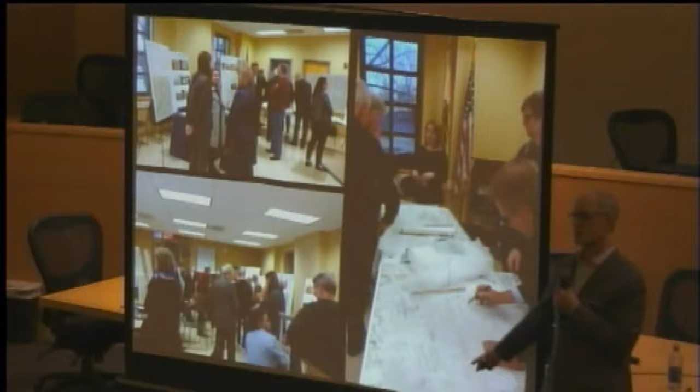I think some of you have heard this discussed previously. There were plans that were shown last year by the seminary, and then there was a stop on that as we went into this redevelopment process. It was declared an area in need, and we really were starting, to some degree, not with a complete blank slate, but certainly with, I think, an openness to receive ideas and try to respond.

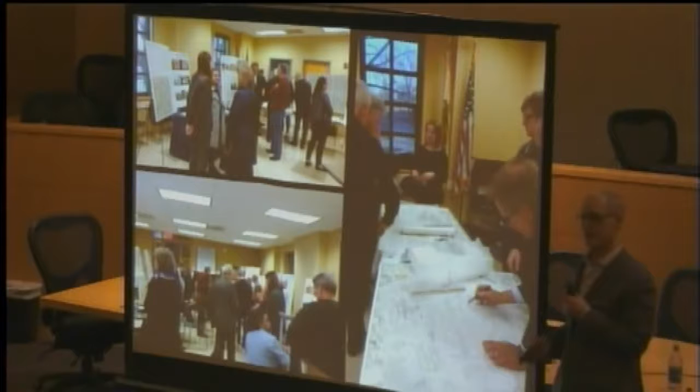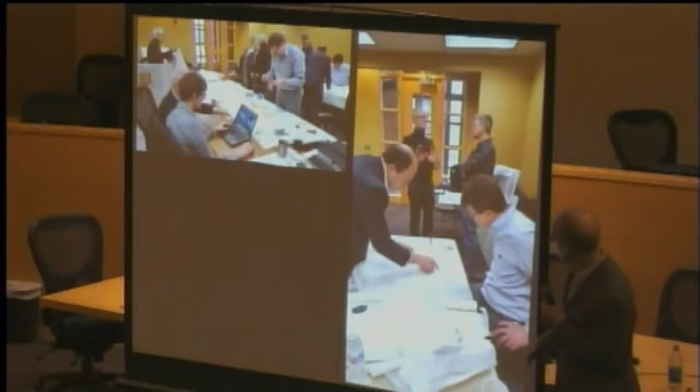Certainly one of those primary goals was to involve the community and the neighborhood. The council said this emphatically back in June when we started the process, to try to create outcomes better than existing zoning. So we took some of this information in, and came back with some concepts last night for the site, and everything's oriented the same.

I think you all know the streets and the area, so we won't go through that. And we showed you an approach A.

We showed you, we heard some things about this. One of the things that was sort of a sticking point was coming in from Stockton. We showed an approach B, which had some great spaces and everything to it. So there were elements of this that we incorporated.

Approach C, which was placing larger buildings closer to Stockton. We incorporated some of that. We looked at some of the recommendations from the Historic Preservation Commission and also had spent some time with them today really trying to work through those.

We also had an approach J for neighbor Joel Schwartz, who dropped in at 3 o'clock yesterday. We felt what he did from 3 o'clock on, we gave him a chance to present last night, and there actually were some ideas that he presented and shared that we incorporated as well.

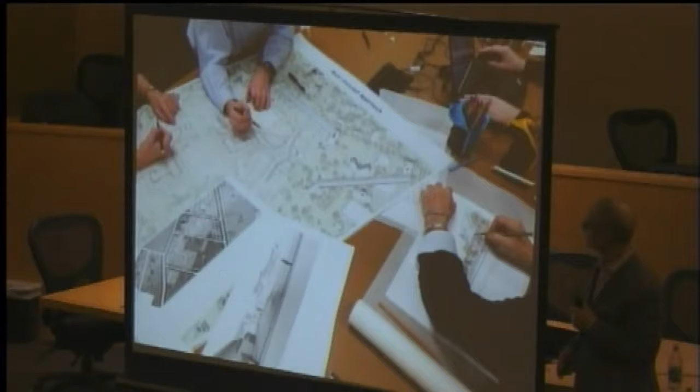So from all of that today, we had more than our work cut out for us to try to translate that, and it really was a team effort that you'll see the results of today. I think that's Rayford's hands at play there and others across the table to the plan that we have before you this evening. So we'd like to try to walk through this in pieces.

We do have it shown at a little greater scale so that you begin to see, because we've had refinements in everything from the gateway at Hibben and the roundabout and what's proposed on Edgehill, as well as to what's actually arranged here in this location as well.

I thought before we get into the plan, it was worth sort of noting this has been a collaborative process. This redevelopment process is different. It's the first time Princeton has used it. It's had incredible levels of neighborhood and community participation.

Keep in mind, the normal way that you end up participating, usually as a community, as neighbors, is you get a notice and you're coming in and there's a fully baked plan and you're beginning to see presentations and having to respond sometimes as it's appearing before public bodies.

In this case, some of the big things that happened as a result of the process: the recreation field on Mercer is being preserved. It's currently zoned for 4 single-family homes, and that was something the seminary offered right up front. We grabbed that property and pulled it into the redevelopment plan because we can use the redevelopment powers to give the municipality and to give that land

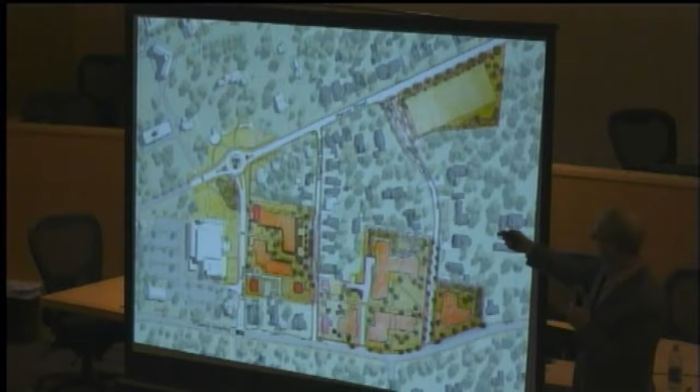The Seminary Library is here at Library Place. Some of the larger conditions we've talked about on Mercer Street—the preservation of the field, an enhanced gateway coming into Hibben. I think it was discovered that the original design for Hibben did have a forked entry. We've calibrated that back in order to accommodate a full recreation field at that point.

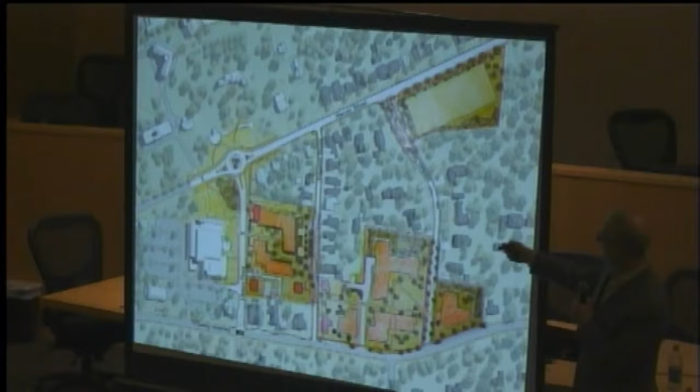There could be some sort of defined, identified gateway at that point that further chokes and pinches the traffic down as you come onto Hibben Street. We've reflected that at the other end with a roundabout at the intersection of Library Place.

A lot of focus on how we can make Library Place perform at a higher order, really be the collector that it should be. We know people now avoid Library and shortcut down Edge Hill or up Hibben, so we really want Library to function better. There's been discussion as well about signalization and possibly an additional turn lane at the other end.

Part of the adjustments we've made on the roundabout, working with the Historic Preservation Commission, have been trying to maintain the sidewalk along Mercer in its most direct route possible, so that you weren't having to bypass the roundabout—and that involves sliding that roundabout into some of the Seminary property on the other side of Mercer Hill.

We think it will help Library Place, it will help Mercer, Bayard, Nassau, Alexander further up the road, and to some degree, if we can raise the performance of Library Place as the major corridor through this area, it should help Lover's Lane as well.

Ball field, fence would come down, some landscape improvements, and a paired, narrowed sort of one-way street in each direction around those existing trees.

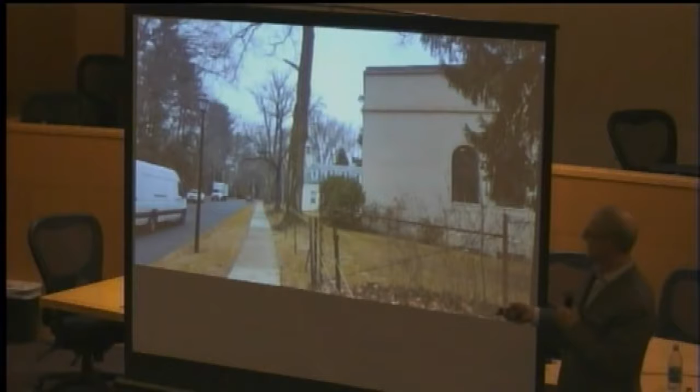We talked a lot about the fact that the blank wall is really sort of a visual terminus. When you hit this first point, speeds are definitely higher than 30 miles per hour at this stretch through here, and what's proposed is to basically create a new landmark, an arrival to Princeton, arrival to the seminary at this location.

And Rayford, I'd like to have you maybe speak to this a little bit. Thank you. I think responding to what Gail has kind of set up for us, there are a variety of forces that we are trying to acknowledge and to work with, engage, and create, both with the neighbors for the seminary, and I think for Princeton at large. So part of the anticipation here is we are trying to create a residential campus for a community, for an institution that's been here for several hundred years.

And as Gail has so aptly said, we would anticipate whatever we build here is suggesting another 100 or 150 years, if not longer. Like the educational institutions that exist in this town—and I must say, as someone who comes from a very large college town up the road, this is very important to acknowledge the role that these institutions play. It's really important for us to acknowledge when the town has actually incorporated into its planning formulas the idea that we need to acknowledge the inhabitation and the institutional presence, that we can acknowledge that in the form of a gateway that really speaks to what we're doing here in Princeton.

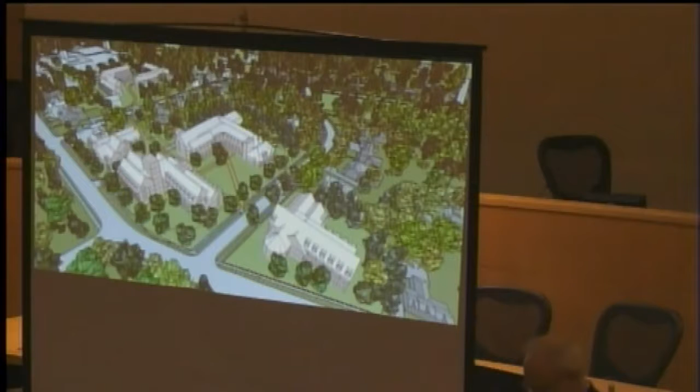So to improve upon some aspects of the Scheme B that we were showing you last night, because we recognize as architects we probably become a bit inured to what we are modeling, and realize, of course, with your responses that the absence of trees, as well as knowing that when we had modeled it, we may have actually inflated or overinflated the massing of the building. So we wanted to make sure to come back today with a sense of some, I'll say, hybrid between Scheme A and Scheme B.

I'm really defaulting to Scheme B, because when we look at that footprint, it actually has the least amount of building on the site. As Joel mentioned last night, we feel like that creates more open space, much like what we currently have with Tennent Green.

So the idea, as I mentioned before, and I'll talk about it in diagrammatic terms later, is to utilize this real estate to provide a pedestrian campus. Part of that challenge has to do with helping with the traffic issues that are currently here.

Quite honestly, these traffic issues are not related to the presence or absence of the seminary. This is a more regional problem of how people come in and out of town. But that's part of what we're trying to help with, because we're talking about people living here as well, and we feel that pedestrian environment would be very important.

To be efficient and minimize impact on the site, we'll generally use a form of building that is a double-loaded corridor, but with the dormers and double gables, we're trying to follow the tradition of what Tennent Hall was using. When you look at the details of Tennent Hall, all the detail is actually on the roof—it's how the building meets the sky. That's part of what we're trying to do here.

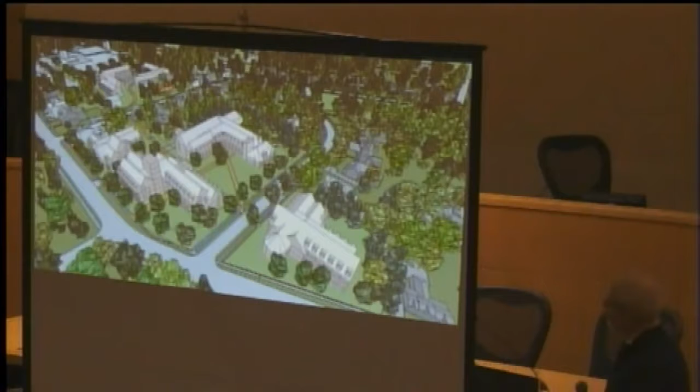So we provide, as you saw in the perspective—let's go back—the idea that this is more symbolic, and that the usable spaces are in fact behind. We're not fencing this off from the neighborhood. This is space we can all enjoy, space we can all use as we walk into town, to be off the city streets—that's part of the intent here.

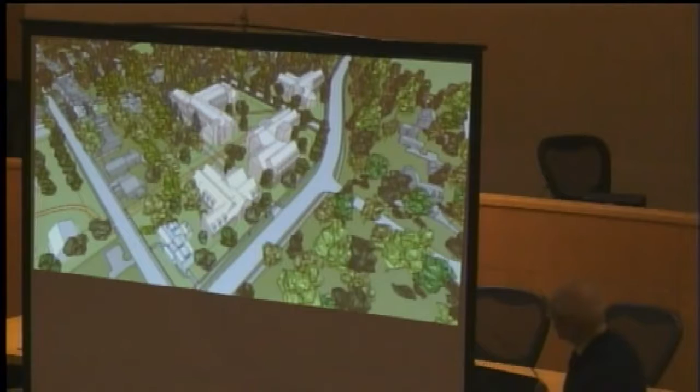Here's the view from above the intersection at the end of Edge Hill. There's 35 Edge Hill, and there's Silvana's—the Clark's house—with the path coming through.

So there's a sensibility of putting most of the massing along Stockton. There's a bit up against the buffer, as you see here, but we're stepping it down as we get close to the house adjacent to the south. So we've been working to tailor and stitch this, while still holding on to the target unit count.

We'll admit there was some inflation when we were modeling yesterday, so as long as we're hitting our target, we can accommodate it with this kit of parts—varying ridgelines, varying heights of buildings, with the motif of an inhabited roof, because that does signify residential life.

Just to go back briefly, what we were speaking to was the ability to keep the students, but not exclusively the students, on campus. Starting from the existing condition at the newly renewed intersection at College and Alexander, the idea in the master plan is that we would come into the core campus—the chapel, the student center—which down the road will need to be replaced.

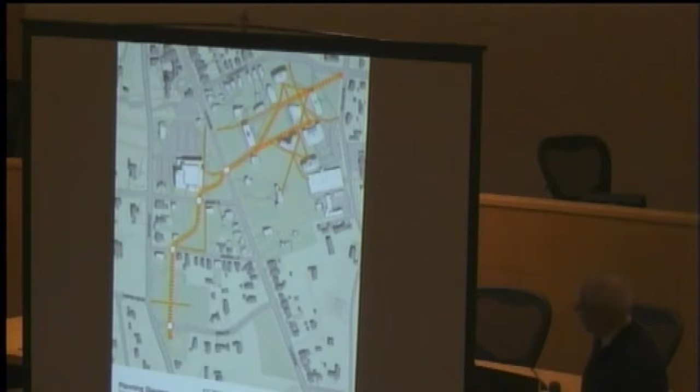So the idea here is that we keep that path intact as a general strategic guideline for organizing open spaces along that path. As I spoke to you last night, even as an architect, what's humbling is that it's in fact the landscape—it's the land between the buildings that actually defines the character of a campus. In most cases, as you see in my perspectives, these buildings should be the scenographic backdrop that reinforces that more Arcadian nature and the serenity of a higher education institution.

And thereby, this is what's important: what we experience, what we like about walking through the seminary or the university campus, is that sense that I'm somewhere else, something that's been redefined. It's a place designated for formation, for education, and I'm in a unique spot. This is something we all acknowledge in Princeton, right? When we walk through the university or the seminary, whether with a particular destination in mind or not, we find it's just pleasant enough that there's enough amenities for us to enjoy.

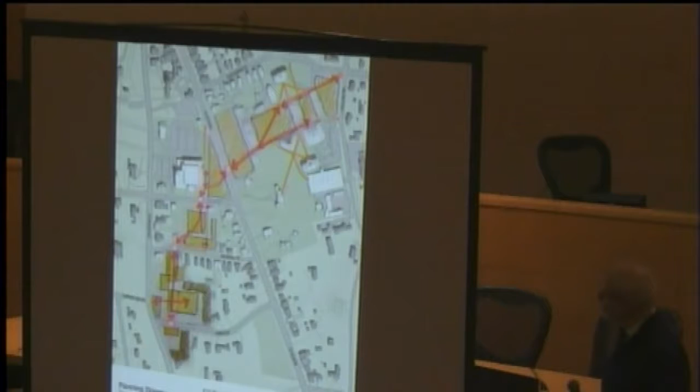And I just wanted to add to the note you mentioned—we do have some model views we're showing this evening; we had some last night. We believe this fairly new, very smart projector was registering in autofocus, and it had actually distorted everything. So for those of you here last night, things looked shockingly large. It took us a little bit this morning to decipher and say, wait a second, this didn't look right. The projector was autofocusing to a proportion that made everything look larger and taller. But yeah, we still looked at the massing and addressed it, though it made everything shockingly disproportionate.

So let's talk about some of the components of this transition into town that we spoke about before. Rayford spoke about—we've actually brought a wonderful building with a little nod to our Scheme J, Joel, out here at this point. It may look familiar, as part of this whole approach into town.

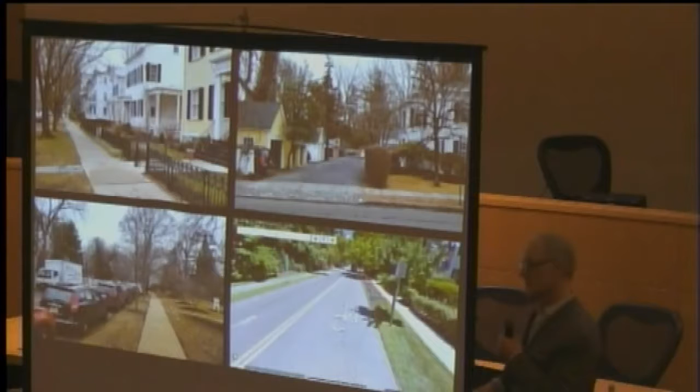So as we were looking at the corridor and understanding some of the issues, one thing that came out was trying to provide an opportunity to bring the on-street parking, which right now begins further into the center of town, out as part of the whole ensemble of approaches to create this sense of arrival that pulls itself down to the campus. Part of that was suggesting the use of a rear lane, similar to what you find on Mercer Street. That lane would be located off of Library Place, which allows the homes with driveways on Stockton to have driveways from behind, and then gain on-street parking on Stockton, which begins right now over here to the left near Trinity Church.

And to bring that down—actually in response to some of what we heard last night—we think parking should come the full length all the way down. Obviously it could be a decision whether it goes further; it may not be warranted. Also, the removal of any parking from the existing gym site allows on-street parking there and on that part of Hibben to provide convenient service for that portion. Again, a little choker or neck-down in the street on Hibben would delineate entering the residential portion of the street. That parking would work in conjunction with the sight lines to the vista we showed you, the little plazette at the corner, and extend itself down into town in a seamless manner.

I should also go back and indicate one of the other opportunities with the on-street parking on the plan: for instance, there's a passage through here, a sightline from Campbellton through there. So somebody could park here and walk over and through that passage to reach back into the buildings—wonderful experiences that activate. I think that's one of the other things that will work in addition.

It's not just the on-street parking, which certainly makes walking and biking more feasible, and would turn this section—right now a highway pushing into town—into a complete street. The whole plan is really envisioning activation where you'll see people and movement, increased foot traffic, bicycle traffic, students—the life of a college town will help with that sense of arrival.

So that brings us to Edgehill Street, where we've spent lots of time trying to focus on ways to bring the hidden garden out, and ways to turn what's right now a blank wall at the back of the institution into an interface with a wonderfully rich residential streetscape. I'm going to have Myra Baird come up right now and speak to this, since she's been working on this for the past couple of days.

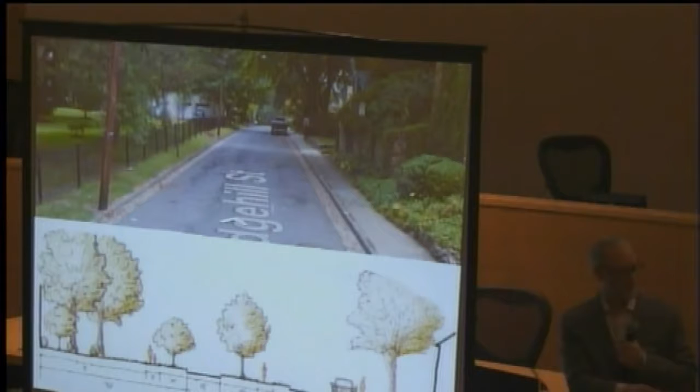Is the plan on the next slide? Plan is on the next slide. Okay, I'm going to start us with the plan here. So what we've been talking about is introducing a traffic slowing device along Edgehill by introducing a change in paving from this point down to this point, which would all be a special paving slightly raised above the existing grade of the street.

And then it would divert traffic—at this point, driving along Edgehill would become one-way going down toward Mercer, and coming back up from Mercer you'd come around this arc. So it would be slightly diverting and narrowing within this area to slow traffic. It would allow for on-street parking, and this whole vicinity would become a clearly designated safe pedestrian zone with slower traffic and site amenities.

This begins with the seminary's distinct desire to have a through, safe, accessible pedestrian route throughout campus. To connect Tennent Roberts and the new development into this, that's one of the reasons we're beginning this paving change at this point—to designate that this is becoming a pedestrian zone, so that pedestrians have safe passage over, across, and through the eventual new development of the Erdman building.

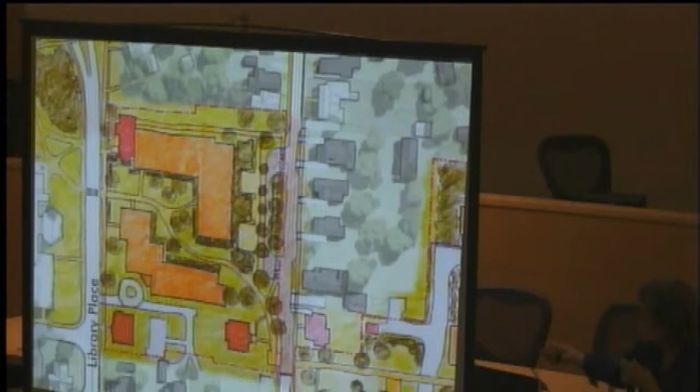Before we began this process, we had been talking in the master plan process with the seminary about the commitment to maintaining this green zone, even with the new development of Erdman within the next 10 to 15 years, so that it can become a community space and amenity for the seminary. What we're showing in concept here is a green forecourt and a more garden-esque area behind, with small areas for seating and gathering, enhancing the lovely planting that already exists throughout the campus.

I'll go back to our section here. So what we're seeing in section, up by Erdman, would have this larger area—about 55 feet—with a seating area up closer to the building, coming out to a pedestrian walk and some perhaps understory flowering trees.

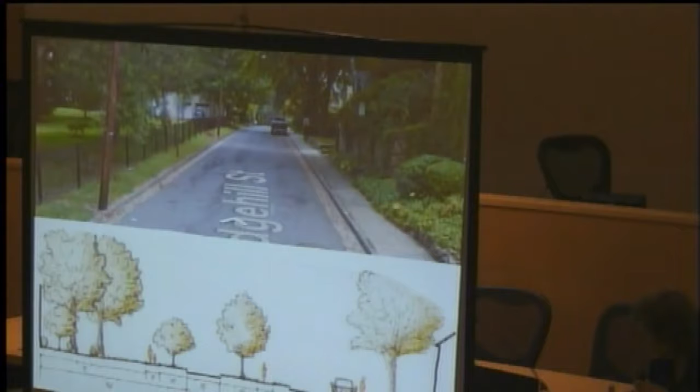This would be your narrowed one-way 12-foot traffic lane, and then this intermediate horticultural forecourt with trees, a pedestrian path, and turf. This would be your main route going straight down toward Mercer, with some on-street parking and the existing houses. We think this combines addressing traffic circulation with knitting together and enhancing the community.

Thank you. Yeah, so that right there would basically be right where the fence is today.

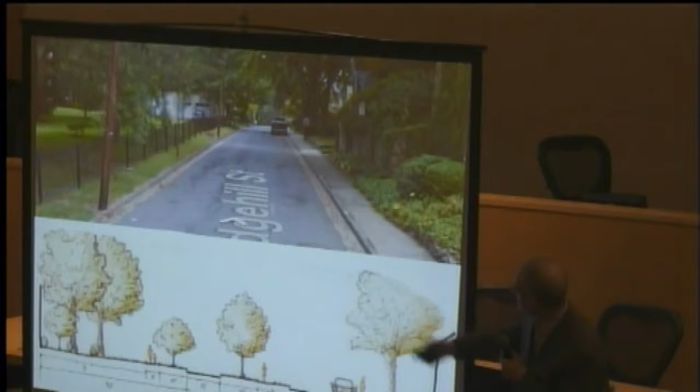We mentioned also an approach even at a very fine grain level—in the access to parking, we've also tried to accommodate the Clark and Jacobus properties to provide for some parking, in fact enhanced parking from what's there today, with access from the rear, so actually increasing their capacity.

That's right in that location there. As I mentioned before, there's an access point for parking under the buildings coming from Stockton Street, between these two buildings here, using the existing driveway, a fairly straight T. We've had lots of discussions since it's a little safer to turn there than from Hibben. The whole orientation approach is using the campus as it extends down Hibben and over and across Edgehill to really help become part of that whole sequence of arriving in town, arriving in a college town, arriving in Princeton.

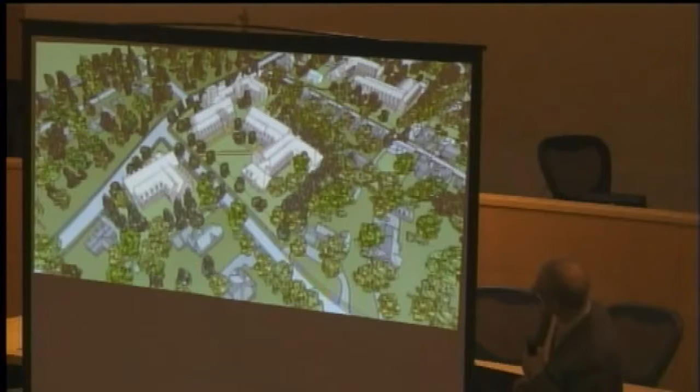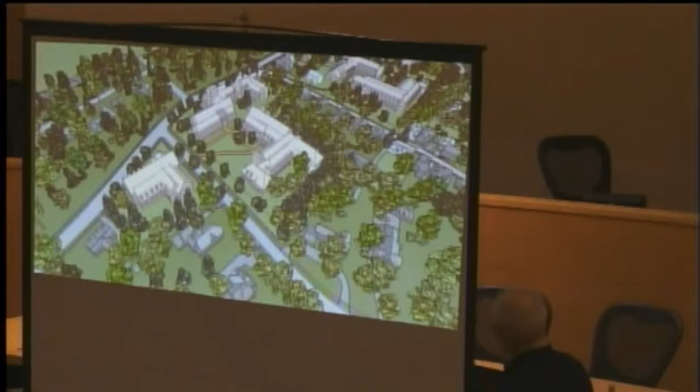Throughout the week, as well as hearing quite directly last night about the intent to put the bulk of the demand for the housing up along Stockton, and as you saw in my sketch, the idea that we use that bulk to signify that form of the gateway, as well as introducing the seminary boundary in a more traditional way, rather than discovering that you're in the seminary when you're in between its two largest buildings.

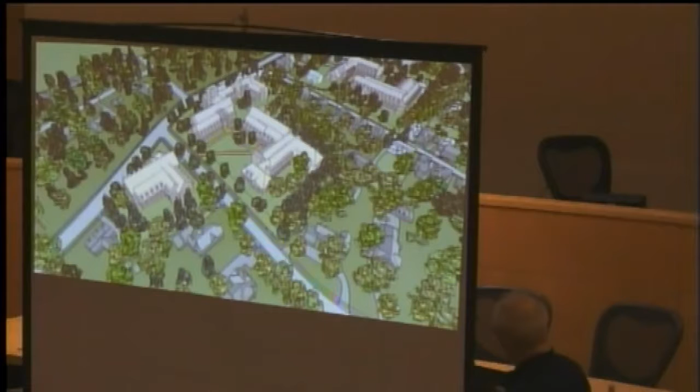So when we go back to look at the massing, we heard immediately last night from Patrick that 50 feet might not be enough. But just to give you a sense of the modeling technique the technology shows us, starting with the conventional prescriptions for the buffers that would separate the R1 from the E4, we would really plant heavy vegetative areas that are also doing stormwater management.

There will be the need to manage all of the water that starts at the top of the hill. This is something we have all inherited, right? With increased development, with the start of the schools that were at the crest of the hill along that ridge line, it's about how we can actually manage the rainfall as it comes, how we keep it, store it, let it percolate through in a very substantive way.

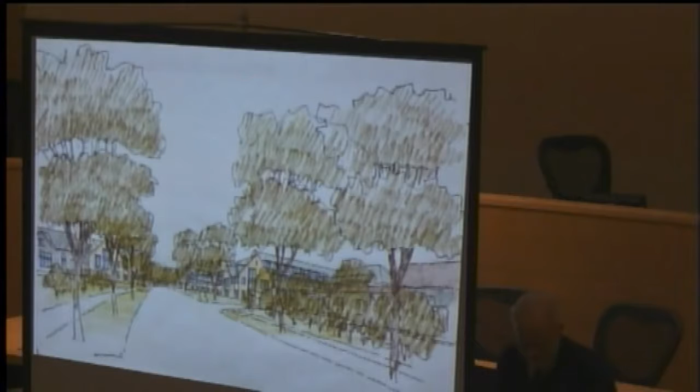But it's also about creating a different kind of space that complements the neighborhood, in addition to the buffer. You can see it starting to scale down both in the backside here in the corner, as well as the approach to the street, so that when we look from the street, we feel like what we're proposing is an extension of that residential community.

So we see the neighbors' houses to the right and to the left here as we're looking up Hibben, and how we are using the motif, much like Tennent, but in a deliberate way that speaks specifically to the seminary character—the idea that we have a residential zone here that is respondent to the scale of the adjacent residential neighborhood.

I have been a little selective in eliminating some of them so we could at least see some of the character with the photographs that we have been taking, of course.

The London plane trees are there, and one of the positive aspects of the gym going away is we didn't have to do all the gymnastics to deal with the traffic—that was actually being threatened by the idea that we create these sort of traffic calming devices. So it's our intent to keep those trees, those hardy London plane trees, when they are healthy.

I think it's also important that what I'm not drawing here, as Silvana and I have talked about, is that I've deliberately eliminated the vision of those overhead utility lines. So that's something that's going to be on my radar here in Princeton for the next years.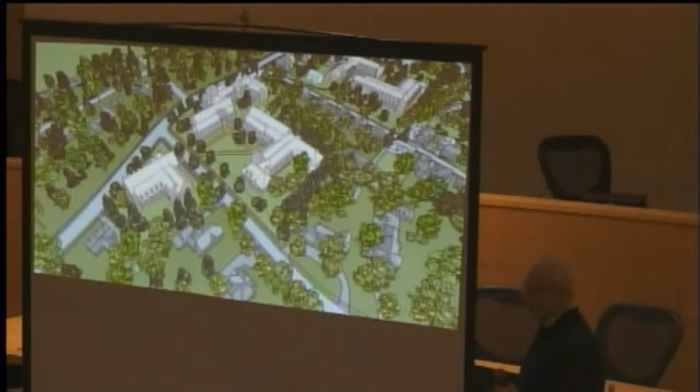I guess we also want to touch on the character that we feel would be appropriate to be respondent to the scale of the neighborhood, as well as generate a distinct but not monolithic or homogeneous character associated with the seminary. As I said before, the idea is to be efficient. It's going to be a double-loaded corridor, meaning a corridor down the center with units to either side, which presents us with a very broad footprint and a broad end.

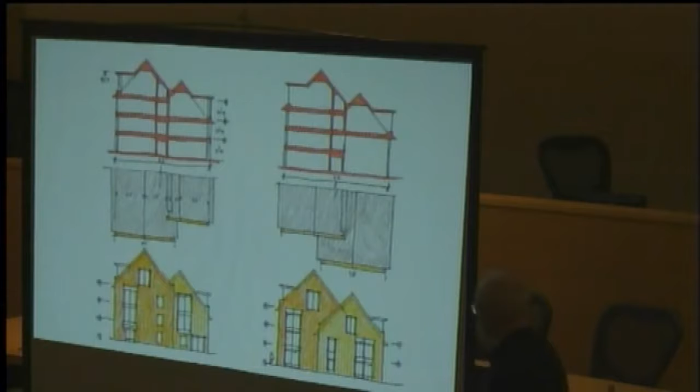I developed the idea that with offset gables, I can reduce the scale of this, creating dramatic bay windows and attic floors, because as we note from the tenant, these are the rooms that everyone loves—when I inhabit the roof, I'm inhabiting rooms with character. The idea is that I can lower or raise these to temper the scale, going from 3 or 4 stories plus the roof as we approach Stockton, down to 2 stories plus the roof as we head closer to residential components. Coloring them shows how the twin gables can be scaled down to look residential. It's institutional, it is the seminary, but it presents a sort of collegial housing associated with people living and learning there.

Stairs can actually provide moments for dramatic interruptions of the horizontality of the floor plates of the housing. So you have bay windows, large corner windows—the types of things we see in the neighborhood houses—and with the gable ends, you can use the towers to mark the institutional presence. I'm not sure we'd need to go that tall, but the idea is that I can see people in and out of the stair and connect to people in the buildings.

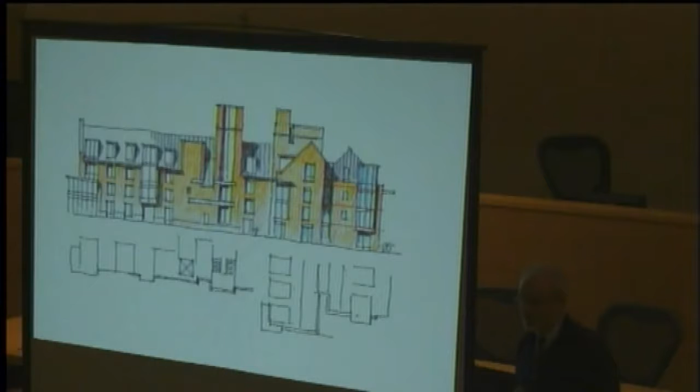In 3 dimensions, the twin gable and the 12-foot bay we're generating gets at the character we're talking about. This is an early sketch I developed to convey the appropriate character, as modeled on the site—starting with the idea of a roofscape inhabited with dormers, a traditional roof with traditional material, if not traditional looking material, to reduce the amount of wall by making the floor at the eave line more transparent. So I have an eave that's hovering instead of a parapet, all to reduce the amount of wall and the impact of the building on the site.

All this was drawn before the redevelopment process, so we were trying to keep everything, as we still are, to a reasonable height, floor to ceiling, floor to floor, that would keep the top of that dormer within the current code zoning compliance.

Mark. To the ridge line, yes. But the town only measures to the eave or to the dormer. Say again, I can't hear you. Well, at least as you instructed in November—thank you—because we were measuring as instructed, we weren't measuring to the midpoint, we were actually measuring to the top of the dormer.

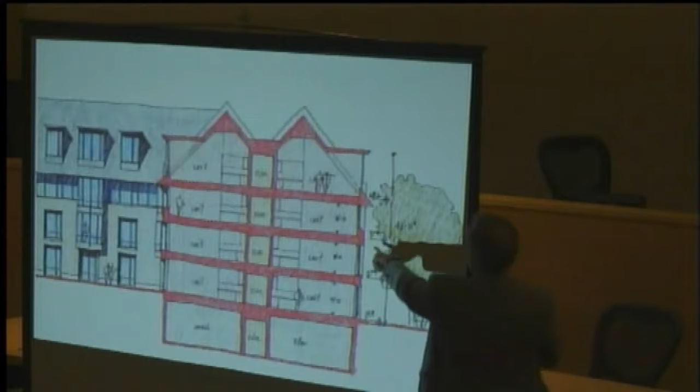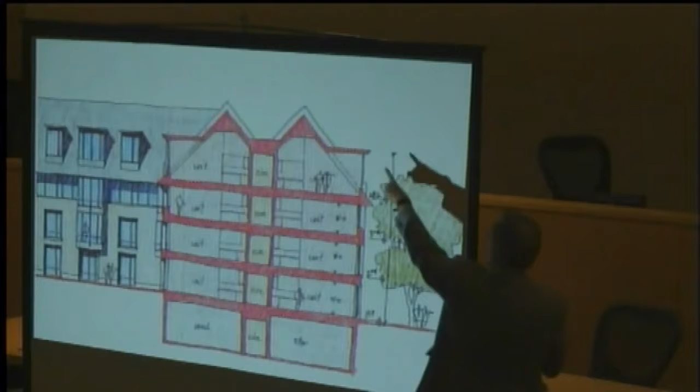So, for example, in this section that we've drawn here, you see the eave line, where the entire dormer line at the center midpoint of the roof is about 43 feet, and you're going to have a space that's probably about 11 feet lower than that, about 32 feet, to the eave line where the roof comes up. We wanted to give you some context so you have some assurance based on other buildings.

So Rayford just spoke about that, but let's look at some of the other buildings on campus. These are actual measured drawings. We're looking at Stuart Hall from the late 1800s, and of course, being a classroom building, it had much bigger floor-to-floor heights, 16, 18, 17 feet.

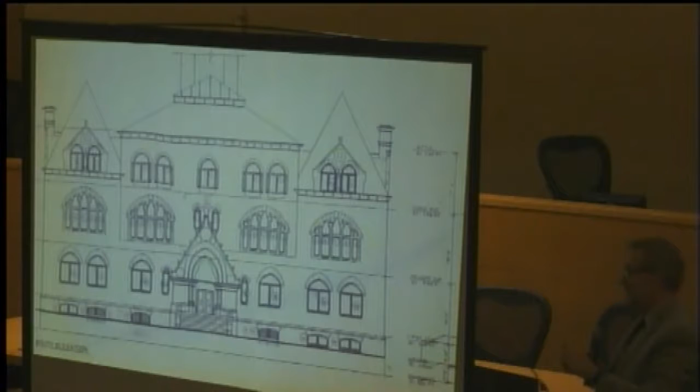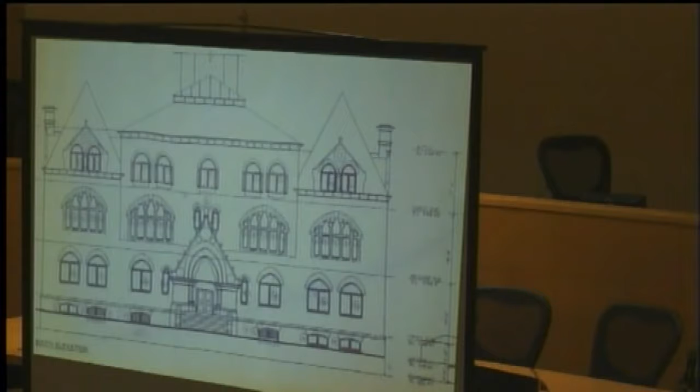But when you get to the top of the highest eave point, right here in the center of the building, you're already at 45 feet, which is only at the midpoint of the dormers, the midpoint of the roof of the buildings we're proposing. And again, these are the buildings at that eave line out towards the Stockton Street side. The buildings back towards the residences and towards Hibben are going to have an eave line more in the range of 35 feet, with a midpoint of the roof only being about 39 or 40 feet.

Another example is the library. The library again has larger floor-to-floor heights because we have larger spaces to accommodate the stacks, the meeting rooms, and even classroom spaces. There's also the atrium in the center of that building if you've been there. Again, we're looking at floor-to-floor heights in the range of 14 feet.

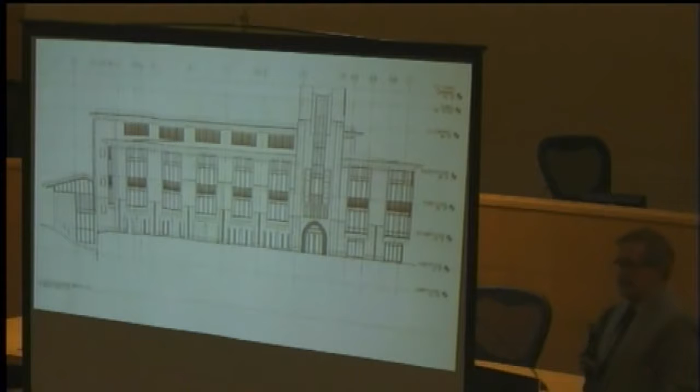Well, this is the elevation that faces Mercer. The height of the top of the parapet of this building is 60 feet. Then this lower eave line, which faces Library Place, is about 42, 45 feet. So again, all of the buildings we're proposing are going to be lower than that — not only the eave line lower, but actually the peaks of the roofs are going to be lower than these buildings.

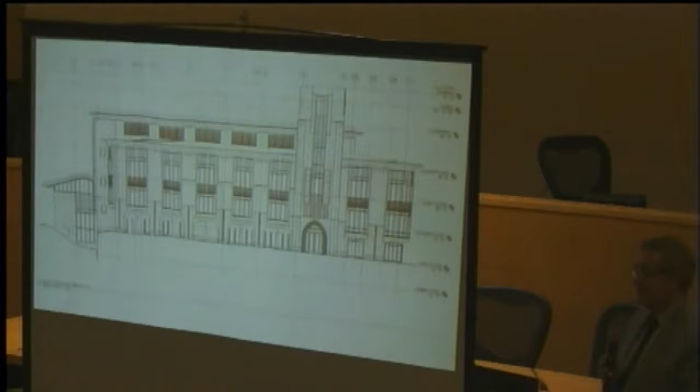Another comparison — again, these are measured drawings from construction drawings, actually measured from the project currently renovating Brown. This building has floor-to-floor heights very similar to what we're going to have, in the 10 to 11 foot range.

So approximately 11-foot floor-to-floor heights. The eave, where the roof begins to spring up, is again about 45 feet, and then the peak of the roof is about 59 or 60 feet, which figures in because in an E4 zone, where these buildings are located, that's the zoning peak — the highest point of the building has to be at about 60 feet. By comparison, we want you to see that the buildings we're proposing — the tallest being along Stockton Street, per what we heard from you last night — then step down a whole story as we get to the buildings along Hibben, backing up to the residential neighborhoods.

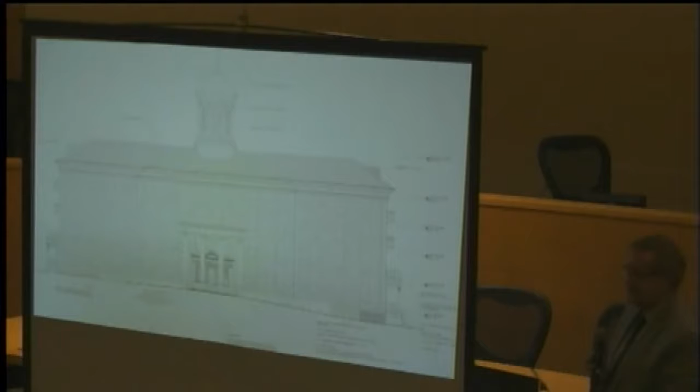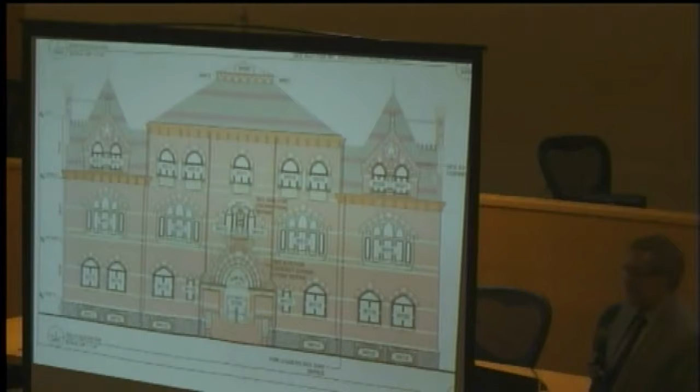And one more example — this is just another measured drawing of Stuart. We went over Stuart before, so again, this is actually a drawing from the preservation work going on now, preserving the stone and replacing the stone, and the roof work currently underway on the main campus.

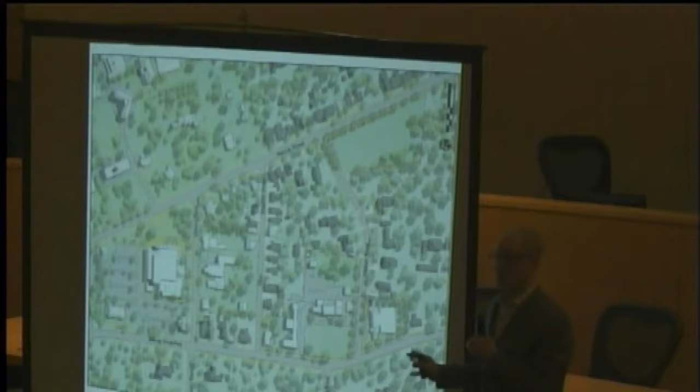Until that time, there's some next step, and the municipality under redevelopment is in full control. That doesn't mean that this plan is approved or adopted. As of today, the existing zoning is still in place, so that's important to recognize, and there is development potential as of right with the existing zoning.

So some of the advantages we believe are available in this redevelopment plan process is the ability, first and foremost, for greater control than conventional zoning, including the ability for absolute preservation of both structures and land. So things like the ball field down on Mercer, which is currently zoned R1 and can have 4 single-family lots as of right,

could be preserved under the redevelopment plan in an absolute manner—site-specific conceptual plan and design standards. So if the municipality goes forward with a redevelopment plan, they'll have a choice about the degree to which they actually develop and lock down in that plan what will happen.

That's different than zoning. With zoning, you create a formula, and then you wait to see what comes in that meets the formula. And right now, the master plan suggests and has lots of concerns and warnings that it lays out, that the educational institutional zoning can result in things, especially when it's close to residential neighborhoods, that have incredible impacts that the formulas can't envision.

So we have control to be able to custom craft this and continue to get feedback and input in terms of refinement. And then setting standards, the plan can be absolutely specific, so you know precisely what will happen, all of the improvements, time frames. Obviously, we can have public proactive participation.

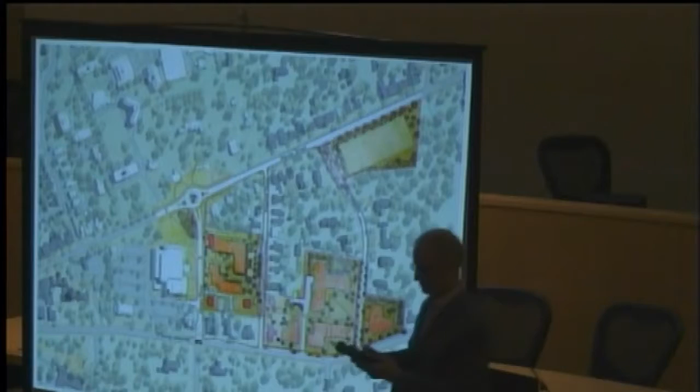Hi, thanks for all of your work. We really appreciate this. There are a couple of things I didn't understand in the presentation. One is, where will cars be allowed to park on Hibben?

That's a detail to go into further. What we've suggested is that Hibben may benefit from a pinch point that defines entering the residential portion of the street, and perhaps the same at this end. An alternate side parking condition may actually help to some degree, along with chicanes that could be placed.

It's also possible to actually test some of these ideas. The pinch points can be tested with cones, for 2 hours, 2 days, or 2 weeks. The same with chicanes, and alternate parking might require some resolution by council. We would recommend testing some of these things to see how traffic responds before reaching a final design, and that would occur in the next phase, involving the neighbors since they'll be there helping to monitor it.

And then the other question: you told us about relative heights of things, but what you've designed for the new Tennent, whatever it is, how will the heights of those buildings compare to what's there now?

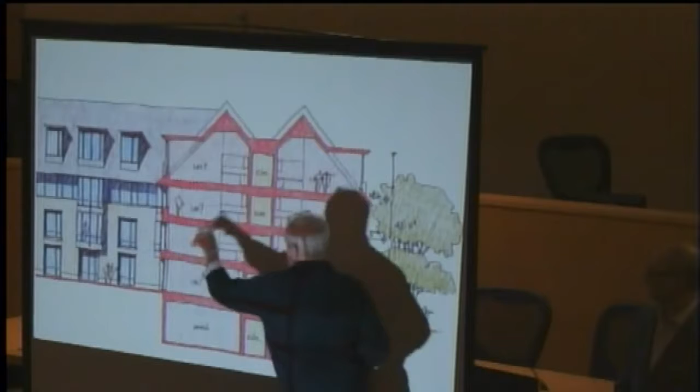So the backside of Tennent would be this height, right? The 3 stories scrolling down, and the slope would come up to here. It's a combination, because Tennent Hall is actually where the land creases and drops down. So it would be coming in where my hand is here, right, and the green line in front starts sloping down.

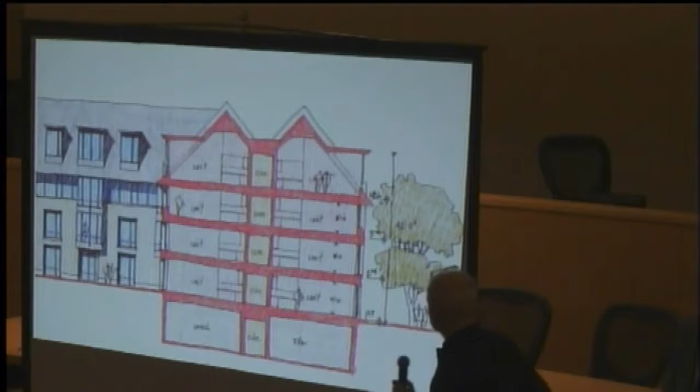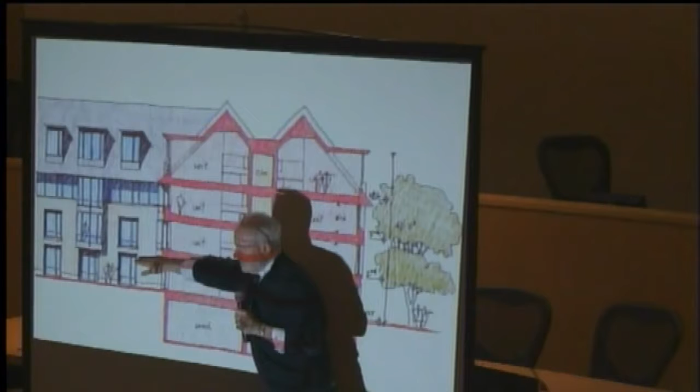Sorry, is this on? So the land - I'm using the graphic because of the morphology we showed you last night - the Tennent green comes in at about this height relative to the floor level, and at the building it starts sloping downhill. So this is about what you see on the backside of Tennent.

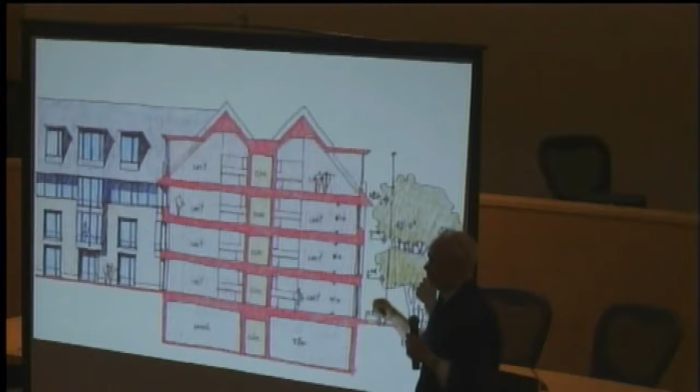Let me ask the question in a slightly different way. If I'm standing on Hibben looking at the new building, will it be higher than if I'm standing on Hibben looking at the existing building, or will it be the same height, or lower? One thing we have done is make sure we break down the scale, so there's no singular height, as we were showing.

Okay, so tell me about the highest point that I see. The ridge line is at about 50 feet high from the grade. And what is it now? Well, it's a gambrel roof - it's a hipped roof, so I'm going to say it's probably about 48, 49 feet. All right, so that's the same as 50.

But we are trying deliberately, much like what Bowen did with those 3 buildings, to modulate. There's no consistent roof height on any of those buildings in the ensemble that is Whiteley, Tennent, and Roberts. Roberts, in fact, is 5 buildings, not 1, and they're segregated like townhouses. Tennent has the pavilions, sort of classic Georgian, where I've got a big building mass, which is the roof we were talking about. Then I've got smaller pavilions, and the gym does the same thing, breaking down the scale as it reaches towards the perimeter.

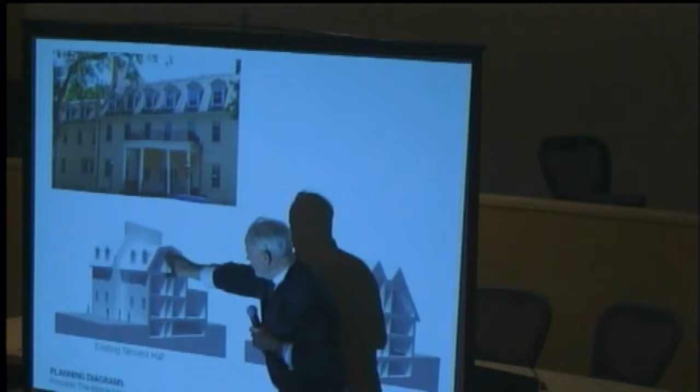So we're trying to employ a similar technique to keep this from looking homogeneous - we're going to start varying the roof height. Here's the comparison: this is the section of Tennent. You see the attic floor inhabited, the 2 floors here. What we don't see here, but in the model, is this dropping off, that basement. This is a 2-story version that shows a larger roof to get more yield in terms of area.

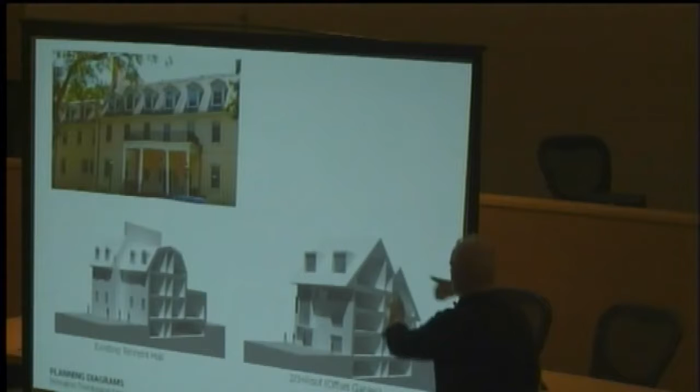Can I advance it? Right, there we go. We were talking about this last night - we have a variety of pieces, because we want the casual residential flavor of this, so we have a series of pieces that speak to what would be the highest point here, but we can bring that down. When we have 2 stories here, we bump that up and get something like that. Or if we need to, when we're up along Stockton Street, we can get the bulk of the yield that we need along there.

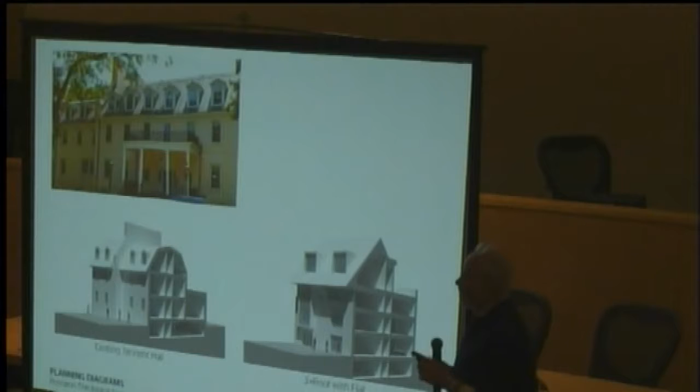If I'm understanding David's question, it's actually a much simpler question than this. If there is indeed a range of peak roof heights on the site now, what's that range - from about the lowest to about the highest - and what's the range on what you've proposed?

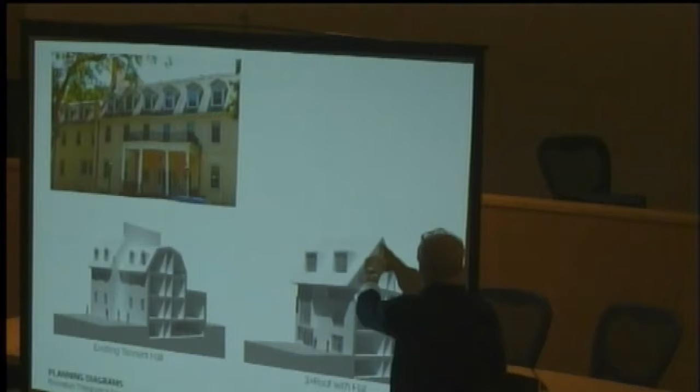This is about 48 feet, right, from here. These are probably 12 feet floor to floor, and that's the ridge. You see what's happening is I get two different pieces here. What we cut through is the low piece, so I'm going to say it's about 50 feet.

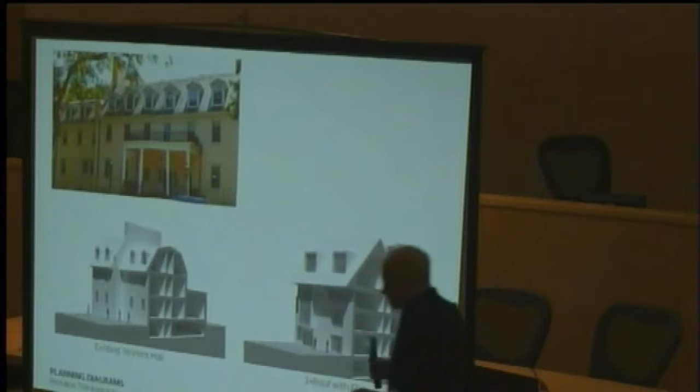So you're saying that the highest points there now are about the highest points in what you're proposing, and there's variations stepping down from that. That's right, they're comparable. Thank you. Would there be changes to the terrain?

Well, we would. I think we've still got to envision what it looks like, not just the mass and the height. What sort of stone would you be using? What buildings that we already know would it resemble? Can we go back? Do we have the other PowerPoint? Can you just go back to the sketch?

We see the tradition of masonry, right? As the architect for the library, I've come to the realization that there has been a tradition of using local stone, with the exception of Mackay, which none of us can figure out, but using a local stone that is an ochre, an amber color, or the like. So what we would anticipate is a material that would be the color of the library.

We think, though, it probably will be brick, right? I would love to use a Roman brick or a Norman brick, a long, slender brick in the tradition of masonry, so that I would get a visual texture here as well, and that will be, I think, in acknowledgement of the color of the three bow-end buildings, which are cream stucco. We choose not to use stucco. We don't think it really is the right material for this climate.

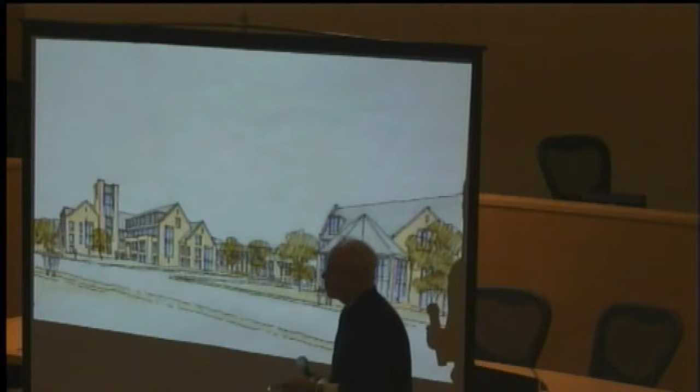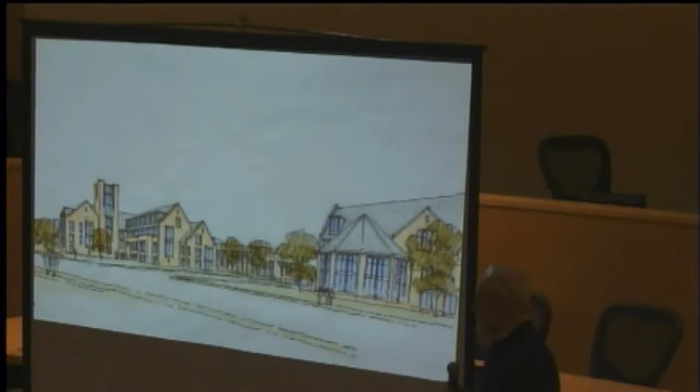And I would imagine that we would be looking at a slate or a slate-like material on the roof. I would not think we'd be going to asphalt shingles. I think this is really a building—Gail said 150 years—when we as builders talk, we talk about 100-year buildings. It's not market conditions dictating that we need to use less expensive materials. So I think we'll be looking at a slate or slate-like material on the roof.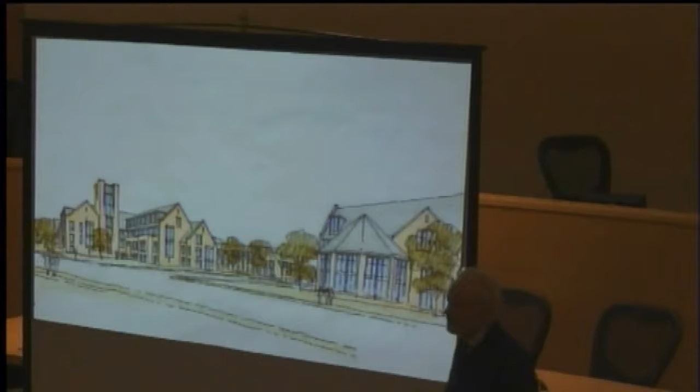Stormwater management is extremely important for us. That's why we speak to how we're going to deal with the slope of the land using the best techniques that we know that are also occupiable. It doesn't do us any good to create stormwater management that no one can use. So part of what's built into the project is to create a system of managing outfall that doesn't exist currently and never existed on that site. Thank you.

Well, I have the mic. I'm an Edge Hill Street resident.

Of the various plans that were examined, the one that seemed most unorthodox to me was Plan C, in which Hibben and Edge Hill streets were closed off into a cul-de-sac, and presumably a road would pass through the campus. Whether your access is from Stockton in the middle on a no-through route, or from Edge Hill or Hibben, might be determined for the purpose of your own operation, but it had an intuitive appeal to me. It's symmetrical with what goes on in the Battle Road neighborhood with respect to another estimable institution, and I wondered why that plan was discarded, basically, of closing off the street completely.

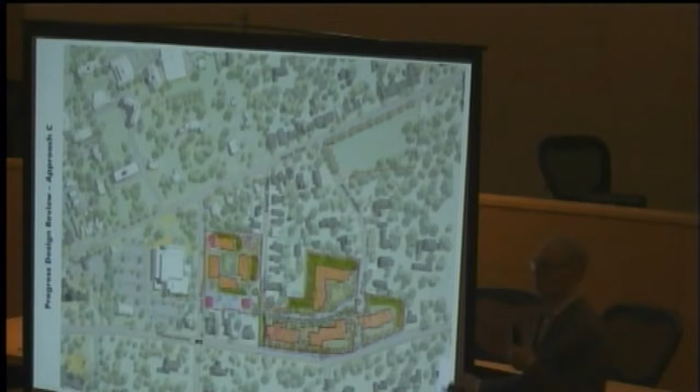The other policy issue raised, particularly important in Princeton, is one of street closures for campus expansion. There are dozens of other situations where you could confront that. So that was a concern raised relative to the functioning of the streets, and we also heard from other neighbors on the streets who did not like the idea of that kind of forced interconnection and no longer accessing Stockton.

Gail? Oh, she's in the back. I'm Jane McLennan. I'm a neighbor of Sean Wilentz, who was at the meeting last night but could not attend tonight. He's written a statement to the Ad-Hoc committee that he asked be read this evening. It's not quite as long as it looks. I did it in big print, so I didn't have to squint.

I would like to express to the ad hoc committee, is there a lot of feedback on this? Okay. I would like to express to the ad hoc committee, the municipality, and the representatives of the Princeton Theological Seminary and the planners from DLR and LRK, as well as to my neighbors, my dismay and alarm at the information imparted at the presentation on Wednesday evening, March 13th, some of which may have been addressed, about the seminary's proposed redevelopment along Edge Hill and Hibben Road.

For months, we have all been working in a spirit of mutual respect, understanding that compromises would be necessary, but trusting in a shared sense of obligation to the historic character of our streets and homes. For months, we residents have been repeatedly told, in letters as well as in conversation, that whatever the compromises might be, nothing would be left to compromise of all that makes the neighborhood such a singular treasure.

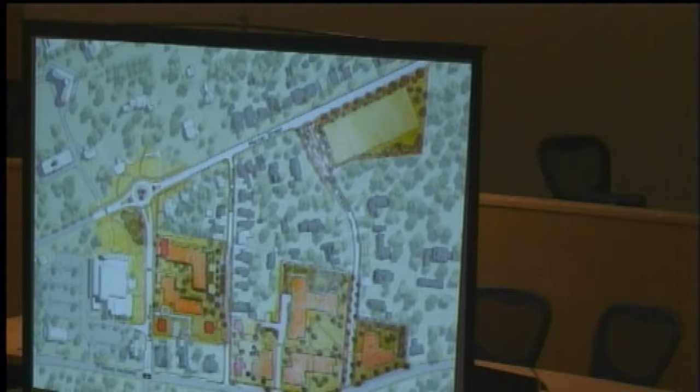So the kind of analysis you do would answer that question, Bob. Here's the kind of stuff that you want to know. So it isn't just a simple answer. Yeah, but I want to. Yeah, so.

Yeah, so Bob, let me give you just a few numbers, and you tell me if they get at what you're thinking. We've gone in the last 2 years from a high of 550 students. We're on the way to 360. We're about 440 right now.

So when the dust clears, we anticipate here and over on the main campus housing about 85% of our students are residential, so 85% of 360 students. And then some of those students have families, so they would be distributed between this site and the dorms up on the main campus.

The concept here, while wanting some flexibility of the type of space in Erdman, is still hotel conferencing, which the site does now. This is for visiting scholars, people coming in for conferences - Rayford's 100 nights a year that he spends in Princeton. So to go beyond the kind of monk-like cells we have now and have something more appropriate if people are here for several weeks using the library.

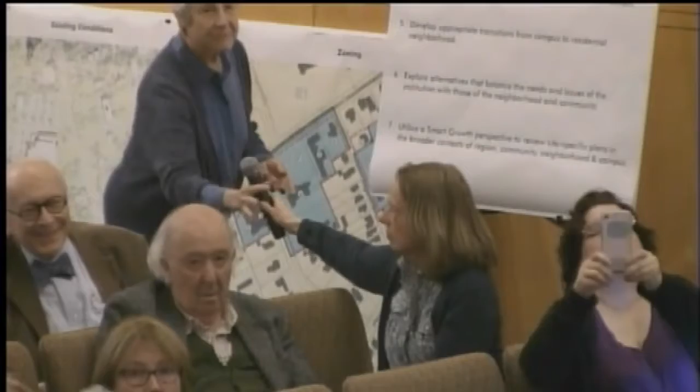At the meeting last night, the last note you got from everybody, Jim, was that most of the buildings should be up near Stockton, and that we should have a little buffer between Hibben, Edgehill, and the neighborhood. I know this is the best out of all the ones you showed, as far as I'm concerned, but I still have a building 50 feet from my house. I feel like there's so much space there that we are now on campus. I just hope, and I think it might be what Mike had said, that the whole thing is just too big for the property, or if we could just move it a little bit so it feels more like it's the campus and not in our neighborhood.

I'm still going to fight for those trees. Everyone from the Ad-Hoc committee and everyone who came to visit the site always talked about Hibben being such a beautiful street, and the reason it's so beautiful is because of the old trees. Take the trees off the street and it's still beautiful houses, but anything we can do to save those really mature, beautiful trees, which you're never going to replace, we should do. I'm not even saying they help with water, but even if they don't, they help with the beauty. That's what makes Princeton, Princeton. That's why I moved to Princeton — that people care about trees. That's what makes Princeton look like Princeton.

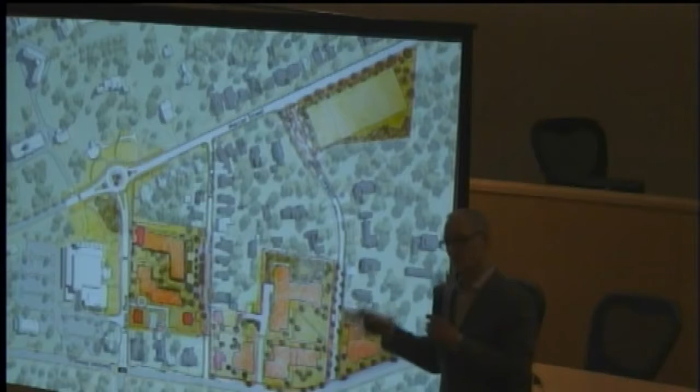We used this process to try to create a concept that would allow for some evaluation and a decision on next steps or more information. I do think it's important to go back and address something, because I think it was unfortunate — I've spent a lot of time with Sean Wilentz, and he went away thinking there was going to be a driveway off of Hibben, because we had a group discussion and took that off the table last night. That was off the table, and the relocation of 92 Stockton, which was in one alternative, is also not included in this.

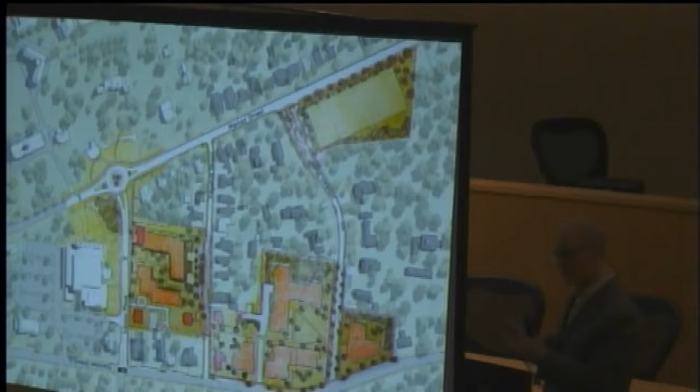As Councilman Cohen alluded to, there were a number of ideas out there. There are elements in this that were not in the seminary's original program or on their wish list that have already been, I'll say, conceded — eliminating the gym, not having access on Hibben, which makes construction issues easier for them, and having the access on Stockton instead, which crosses this pedestrian route and things of that nature. So I think all the comments are valid. We need to address some of what we've heard tonight, but I think it's only fair to acknowledge that this has been moving, and that we've been in real time trying to address concerns, with concessions already part of the process. We'll let the ad hoc committee go from there.

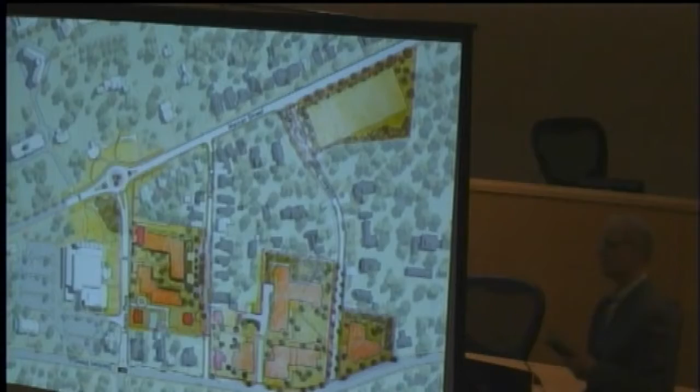Just on the issue of Erdman, it's been kind of implicit all along that this project was in the background, and I've heard words like a 10 or 15-year horizon, yet it looks extremely imposing on the map. I'm wondering if that discussion needs to be taken into account during this deliberative process, so that 5 years from now when this project is over, Erdman isn't slipped under the transom. Particularly the height of that building in that neighborhood, which is quite different than the open space at the Stockton-Hibben junction—I think that's partly what Sean was reacting to, because he lives 50 feet from there, and I live across the street. So I don't know, but I'm wondering where that fits in.

Do you want to address that? I mean... yeah.

Good evening. I would like to know how definitive the Edge Hill Street road plan is—sorry, I'm tired, it's late—how defined is that loop going to be? Is that definite, or where are we with that? 'Cause I'm personally not so keen on that loop. I'm just wondering about that.

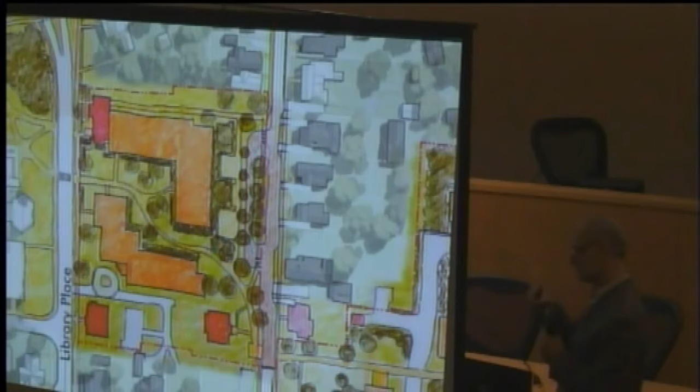It's a series of small interventions—traffic going this way would have to slow down, raise up, then slightly swerve in, return, with on-street parking, then come down and continue. There's a lot of physical intervention, but this doesn't have to occur. Edge Hill Street could remain as is.

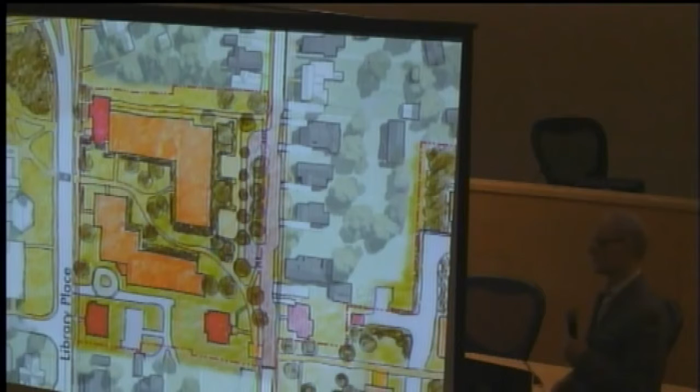That was something the Historic Preservation Commission recommended. The two questions are: one, it just appears like more cement, more surface compared to what it is now, and I think it significantly changes the aesthetic of the neighborhood. And also, the brick wall that's there now, as you enter Edge Hill on your right—is that going to be removed, relocated, or reconfigured?